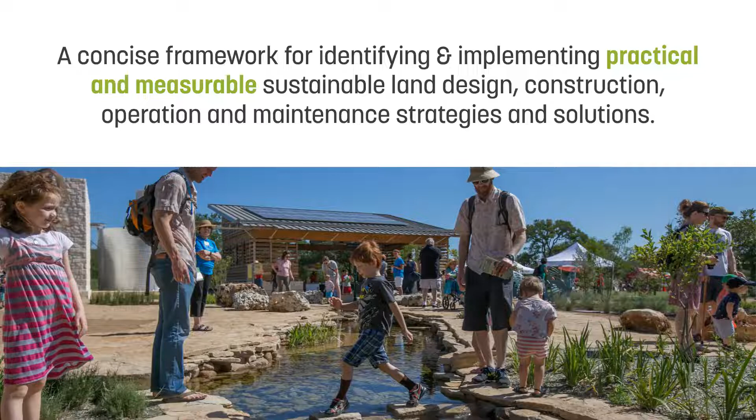In landscape practice today, the Sustainable Sites Initiative, managed by Green Business Certification Incorporation, is often used to rate sustainable land design, construction, operation, and maintenance strategies and solutions. It can also be used as a concise framework for identifying and implementing sustainable landscape. It's more focused on environmental sustainability, with some coverage of the social perspective and limited coverage of economics. The current version includes 10 sections covering site context, pre-design assessment and planning, design, construction, operations and maintenance, education and performance monitoring, and innovation and exemplary performance, with a total of 200 points and 4 certification levels.

Over 100 projects have been certified so far globally, and 5 of them are in China. Among those 5 projects, both Xuhui Runway Park and Guangzhou Biotan Exhibition Center are designed by our teams.

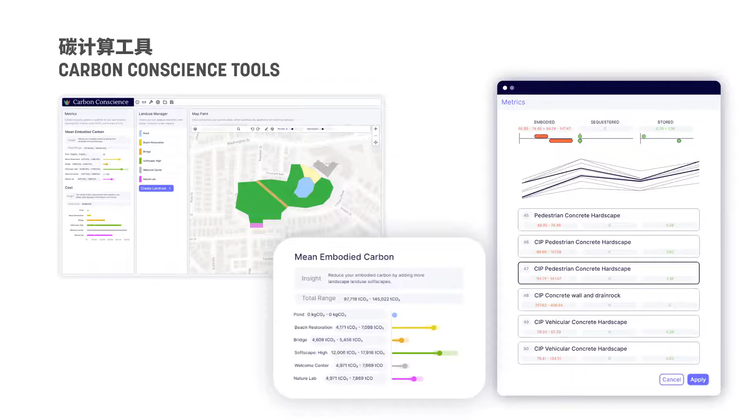Besides sites, many organizations have also developed carbon calculation tools. Carbon Conscience was developed by Sasaki earlier this year. It's used to calculate both the carbon emission and the carbon sequestration for a project.

Next, I'm going to use Xuhui Runway Park as an example to explain what's involved in designing a sustainable landscape and how it gets site certification.

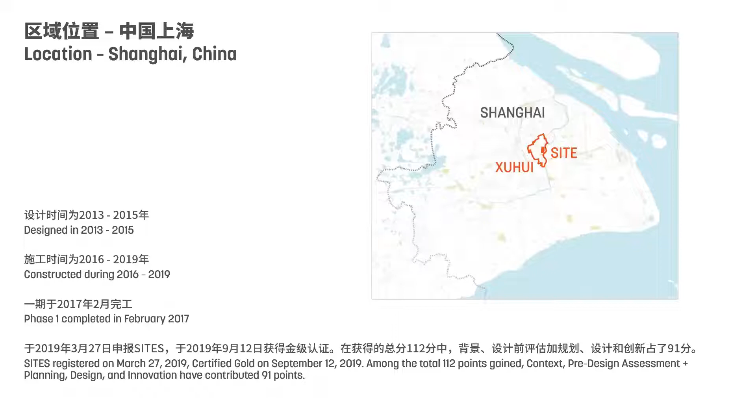The site is in Xuhui district of Shanghai. It used to be the main runway of Longhua Airport for over 70 years. The airport was originally built in 1922 as a military strip, then converted to a civil airport 7 years later. In 1946, when China joined the International Civil Aviation Organization, Longhua Airport was designated as China's primary international airport. It was also the largest international airport in Eastern Asia back then.

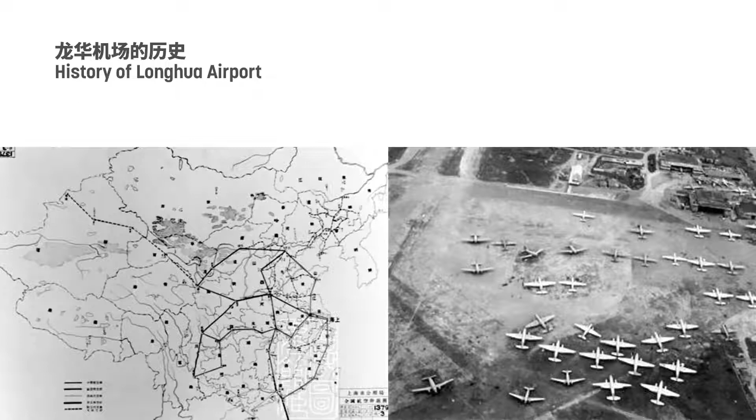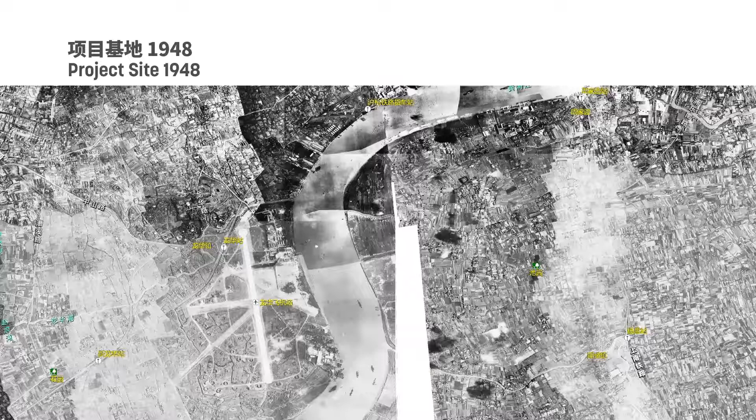The runway we saw today was built in 1948, when the area was still at the perimeter of the city and surrounded by extensive farmland. As the city grew, the area around the airport had been gradually developed, and Shanghai moved its civil aviation base to Hongqiao since the 1960s, although Longhua Airport remained in operation as a general airport until the early 21st century.

In Shanghai's master plan for 2035, Xuhui Riverfront, where the airport was located, was envisioned as one of the future poles of growth and will be transformed into a mixed-use district of residential, commercial, office, and cultural destinations.

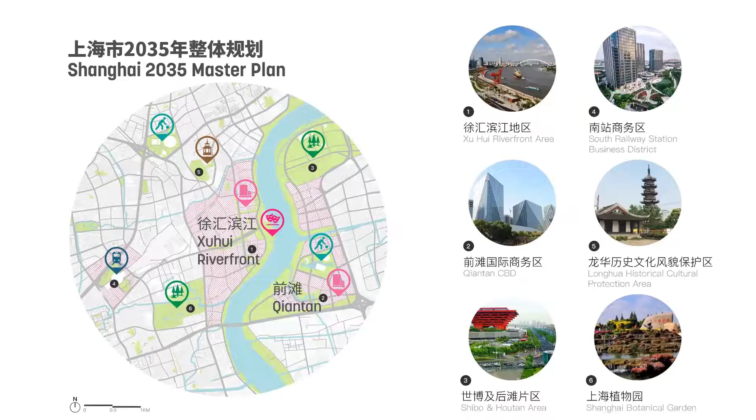The historic runway was to be converted to a 50-meter wide park and a 34-meter wide street. Both are going to be surrounded by high-density residential, commercial, and office uses. A new subway will be running underneath the historic runway.

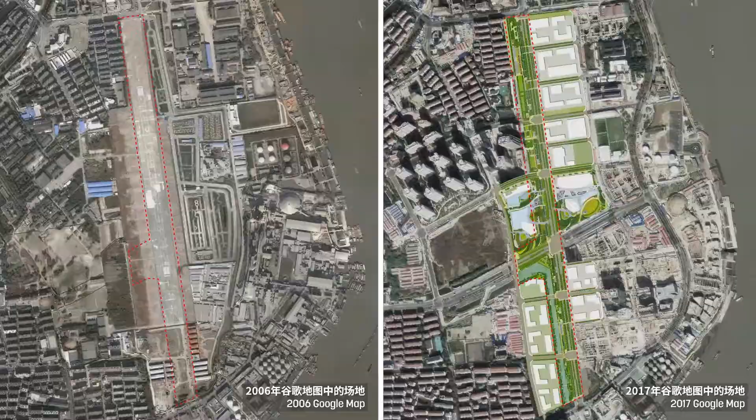As an urban redevelopment, the site itself meets the prerequisites and can get many credits in the site context section of sites. It was a developed brownfield site within existing developed areas and will be well connected with multimodal transit networks.

Our design concept, Runway of Modern Life, was inspired by the site's unique history and integrates with nearby communities' daily needs. The design mimics the motion of a runway, creating diverse linear spaces for vehicles, bicycles, and pedestrians, and organizing the park and the street into an interconnected sequence at a runway scale, a runway of modern life.

Although all spaces are linear in form, we had used different scales, topography, programs, and materials to create diverse spatial experience. Ascending and descending movements were applied in the park to replicate the experience of being on an airplane, connecting visitors to the site's past and providing a collection of distinctive views.

The layout of the street also contributes to the urban scale of the district by limiting the number of vehicular travel lanes and promoting public transit over personal cars. Designated bike lanes are integrated into the street section, facilitating the last 1 kilometer transit connection between the transit and various destinations. 6 rows of deciduous trees were planted along the street to create a comfortable microclimate, seasonal color, and a pedestrian-scaled boulevard.

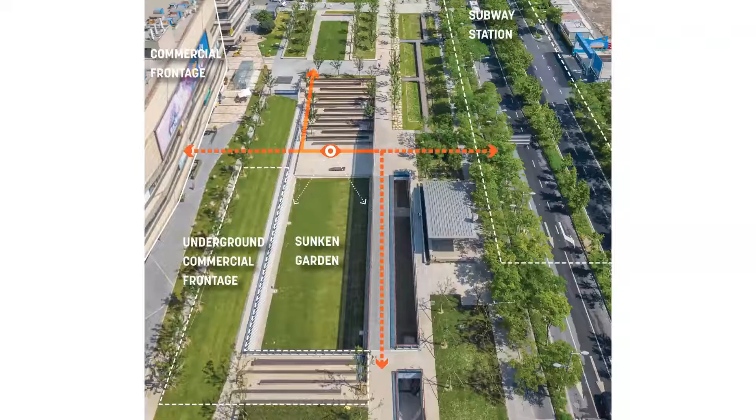The project was designed and built before it registered for sites. We simply followed good practice for a sustainable landscape through the entire design and construction process. The design was focused on connection and uses, site memory, stormwater management, native plants, and habitats. And those were closely related to the social, environmental, and economic perspectives of sustainable landscape.

We had planned diverse programs in the park, accessible to all and primarily free of charge. Active lifestyles are nurtured in multiple forms of runways. Informal soccer games can be held in multi-purpose lawn. Cultural events and performances are accommodated in the sunken garden, while smaller social gatherings can take place in various restaurants and public service facilities scattered throughout the park.

Private conversations and reflection can take place in multiple gardens, the riverfront, and bird-watching grove, offering a respite from the busy urban life.

The entire park is universally accessible, providing equal opportunities for all groups of people. The park has served as a year-round destination for nearby residents, office workers, families, and students today. All of these meet the requirements of the human health and well-being section in sites and received many credits. The park is accessible, promoting equitable use, supporting mental restoration, physical activity, and social connection.

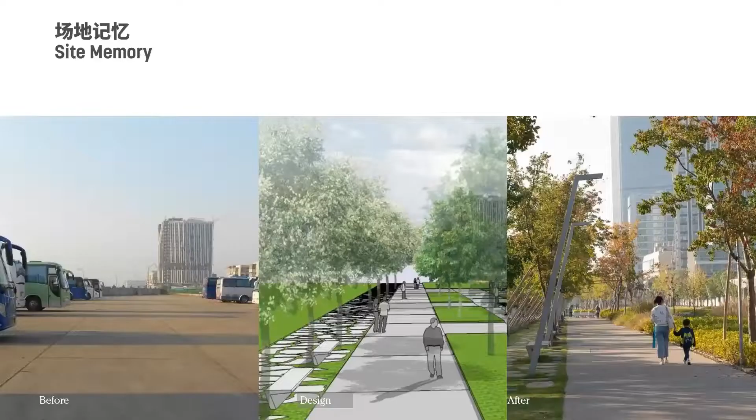When we were tracing the site memory from its airport life, we had carefully investigated the site and identified a row of original runway concrete panels, which remained integral and structurally sound. These panels were preserved as the main path of the park to prolong the site's memory.

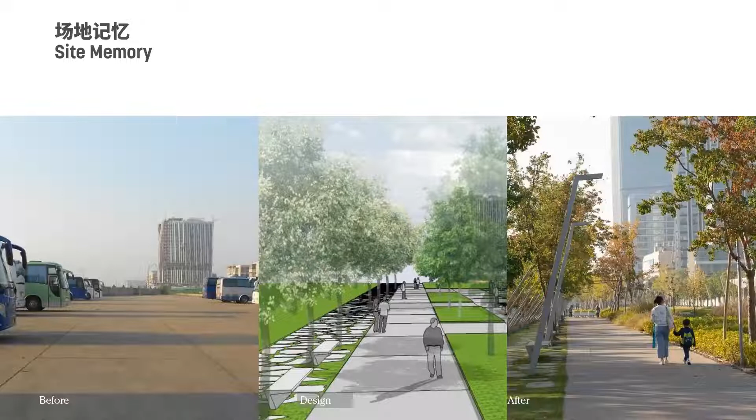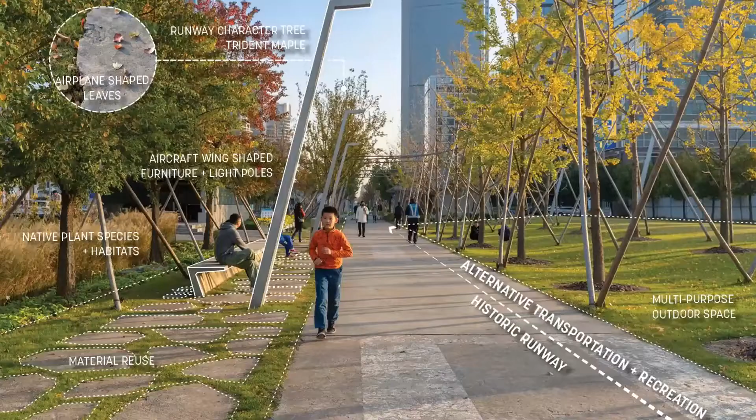The smaller concrete sections from the demolished runway were also reused at the resting areas around the main path. Trident maple was planted as the iconic tree species, delineating the preserved runway panels due to its similar leaf form to the Trident airplane. The preservation and reuse of the runway concrete on site has not only saved construction cost, but also reduced greenhouse gas emissions from manufacturing new concrete.

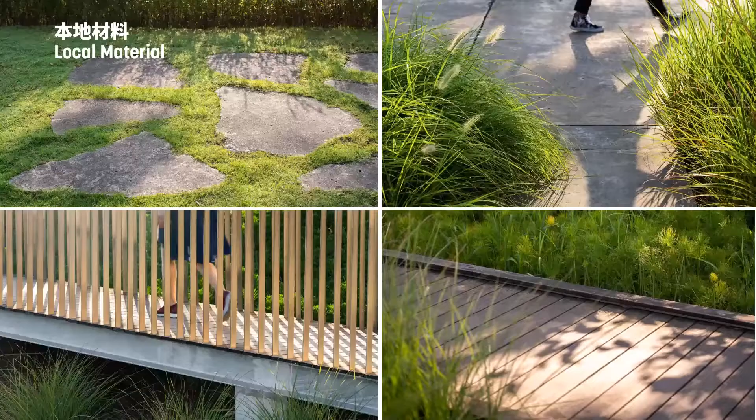The site furnishings were designed to evoke an aviation-inspired identity, with benches and light posts recalling the form of airplane wings. Most construction materials were sourced locally to reduce emissions from transportation and support the local economy. For example, fused bamboo lumber was used as a sustainable substitute for tropical hardwood on benches, boardwalks, and riverfront overlooks due to its fast-growing nature, comparable strength, and longevity in outdoor environments.

The material selections we made entitled us to credits for maintaining existing pavement, using salvaged materials, and regional materials.

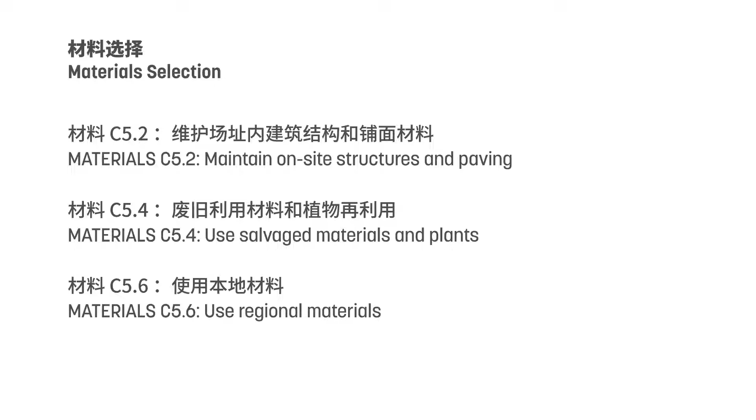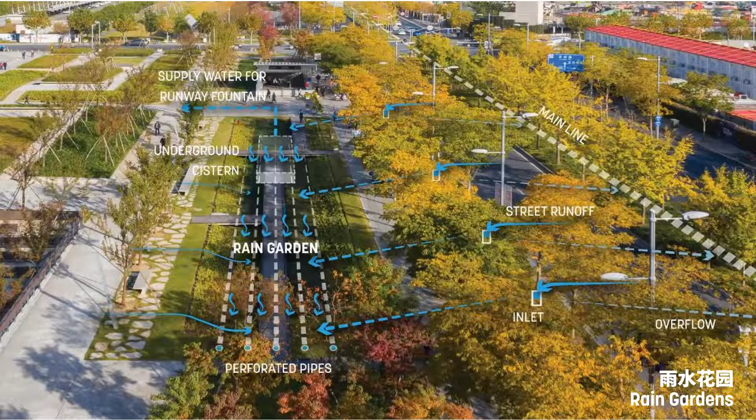Stormwater from both the park and the street is managed through the rain gardens and constructed wetland. The rain gardens can collect and filter up to the 95th percentile of annual storm events. The treated stormwater meets quality requirements for recreational water suitable for human touch under local codes. Portions of the treated stormwater are diverted to an underground cistern and prepared for the park's operational use, including the full water supply for the interactive runway fountain.

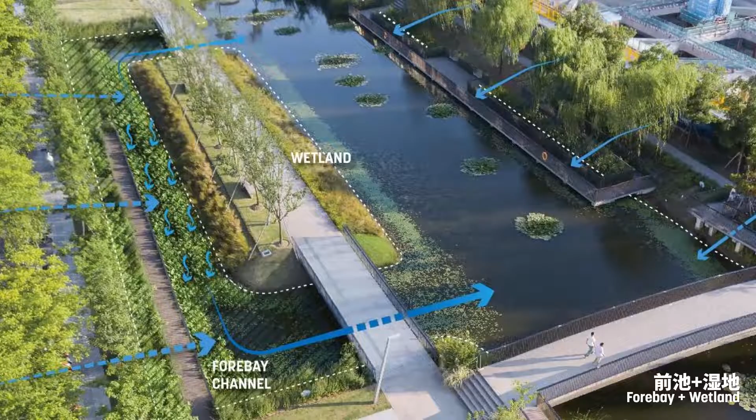The rainwater along the canal was filtered through the forebay and the constructed wetland. It not only settles sediments and filters pollutants in the runoff, but also provides a stable supply for the canal. All the effort in stormwater management also gets us multiple credits related to managing precipitation, reducing water use and irrigation, and designing functional stormwater amenities.

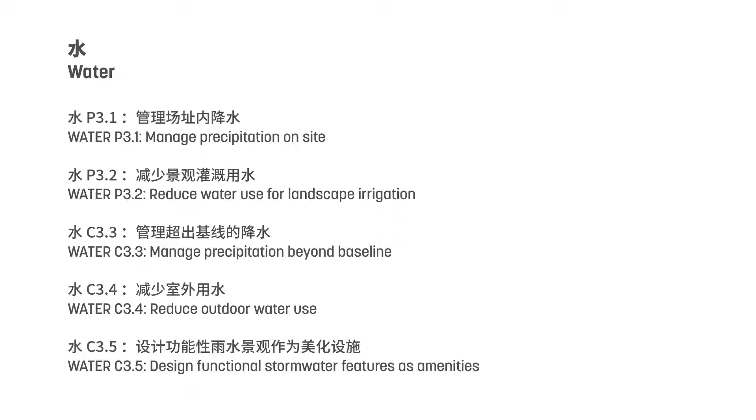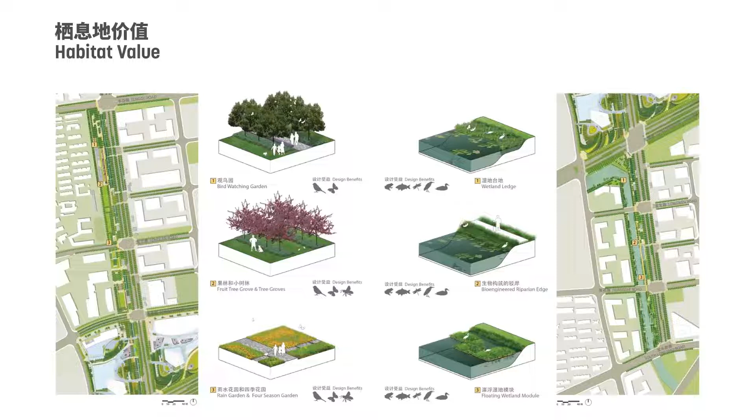All the stormwater treatment measures offer not only nice scenery, but also valuable wildlife habitat. In the rain gardens, you'll find iris and purple loosestrife in the spring, hosta and silvergrass in the summer, and chrysanthemum in the fall. It has become a place enjoyed by people and diverse wildlife species all year round.

The canal front, the forebay, and wetland provide great habitats for waterfowl and attract many people to come and enjoy. All plants in the park are native to the Yangtze River Delta. 68% of the park's hardscape is shaded, providing a comfortable microclimate.

These also contributed to the soil and vegetation credits. We used all native plants and restored native plant communities, optimized the biomass, and reduced urban heat island effects.

Among the total 112 points the project received, site context, pre-design assessment and planning, and design and innovation contributed 91 points. At the end, the project received the first SITES Gold certification in mainland China, and many national and international design awards.

Following the project's construction, many major residential, commercial, and office developments were implemented on adjacent parcels. The property value of the adjoining neighborhood has increased over 80% since 2015. The project turned out to be a real success.

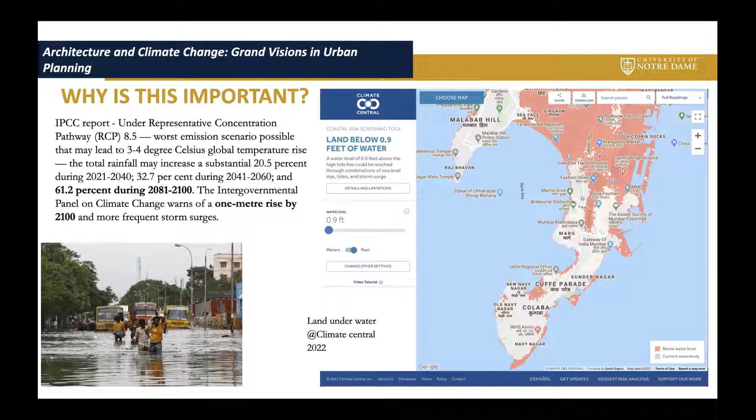The report from IPCC's research on this topic showed a large impact due to sea level rise predictions for the area. The Government of India has measured tidal wave information and seen a dramatic increase in water levels in just a span of 7 years. It is predicted that the city would see a meter rise by 2100. This created major concern for people involved in the studies, and a deeper dive into understanding the impact of sea level rise and climate change on the city of Mumbai was needed.

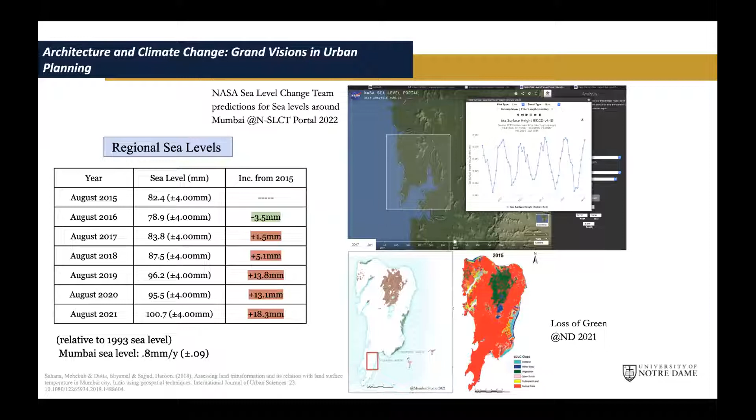The city also faces issues due to drinking water scarcity. An estimated 55% of people live under poverty conditions with very poor housing available. With depleting resources, including groundwater, which is slowly drying up and being utilized at a very high rate, the impact of sea level rise is not just from water surrounding the land, but also from it slowly entering the water tables of the city, creating contamination issues.

Surrounded on three sides by water and with a population of around 22 million people, around 9 million live on the planned site that is the area of study for this research. The site became extremely critical to examine at this time.

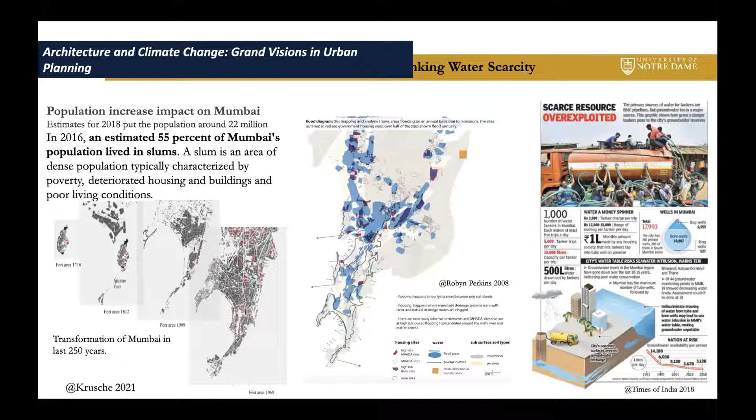The research question posed was: how do we predict which of these data sets are correct, and what would be the impact of sea level rise on the city of Mumbai? How important is it to understand the source of the data being used and the accuracy of this level of study? The NASA sea level change team seems to have the most resourceful data sets. These are much more precise in the context of the United States, but also fairly strong in the case of Mumbai, and are being used to examine the sea level rise projection for the site.

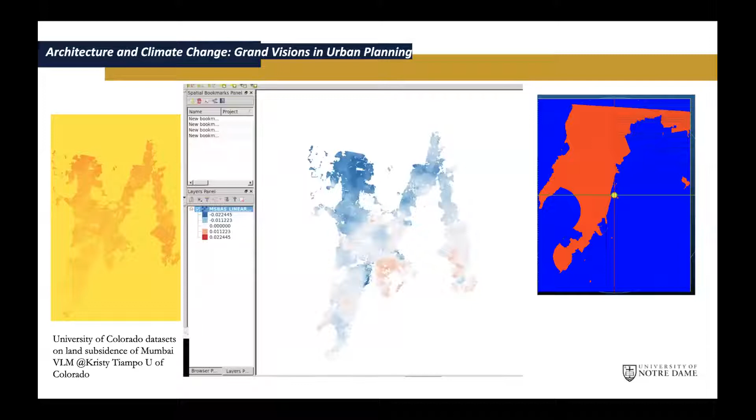Beyond these, there was a need for information related to surface DEM, or digital elevation models, and land subsidence for the city. The University of Colorado's research center, CIRES, is looking at land indentation and land subsidence data for Mumbai. We are cross-referencing these data sets with tidal data from the Government of India and land data collected from Xylem Water Solutions. All this information is put together to allow a collective examination of the impact of sea level rise and heavy rainfall on the city of Mumbai.

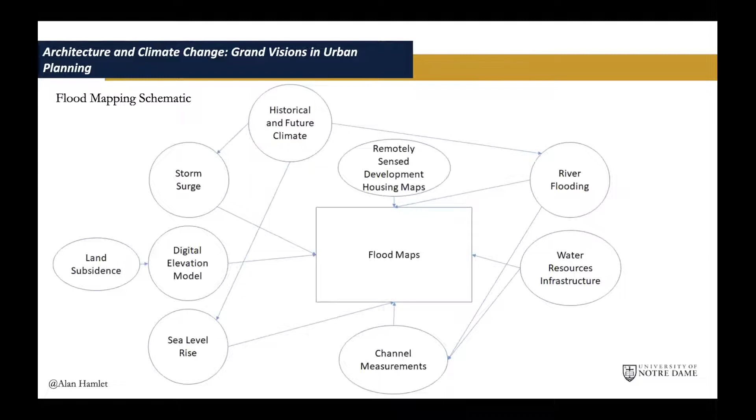This, along with various teams we have at Notre Dame, including computer science, engineering, hydrology, and of course the School of Architecture, have created a consortium to tackle the problem of understanding the cumulative impact on the site.

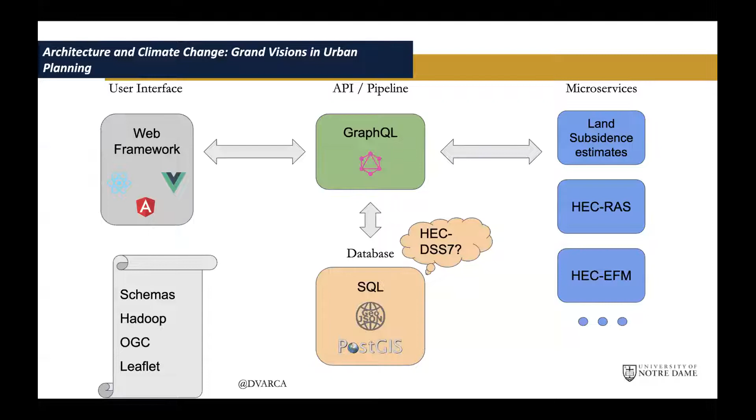This ongoing study will be available in a visual way for various researchers to use in the future, on a Python platform that we hope to integrate on the NASA website, giving government authorities proper predictability and resourceful use of the data for planning purposes.

So what would be the right solution for the city of Mumbai? The right solution would have to create a balance between the biosphere that surrounds the site, allowing the natural environment and built environment to coexist positively. A good urban plan would normally balance both in a manner that allows the coexistence of natural ecosystems along with built ecosystems in a way that we survive today.

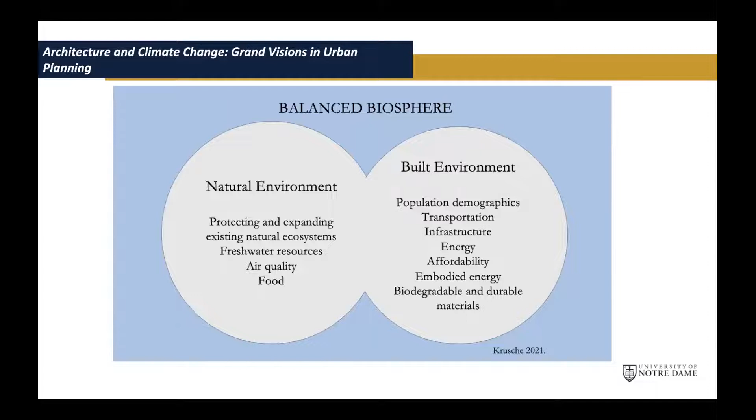The eastern waterfront of Mumbai city is a $1 trillion development property, mainly under the possession of Mumbai Port authorities, a large holding for the Indian Navy and other government activities. This area is predominantly used as a port and has been open for new development in recent months. As the city grows, this land will play a vital role in its future development.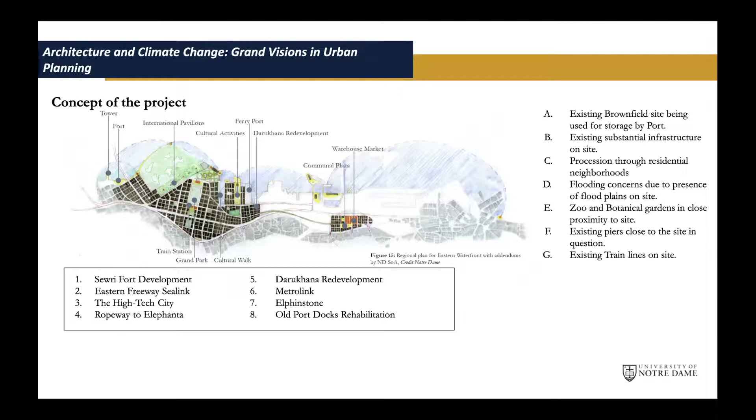The solution we proposed here took many, many months of work to come together, and this is the first conceptual thought process put together by the class of 2022. The solution for the design was to take into consideration the fact that there are low-lying areas that had to have green natural parkland in relation to the new development. Our research showed that the site is highly susceptible to low-lying floodplains.

The whole area would have to have a lagoon that would protect the site from large tidal impact and also act as a natural barrier between the sweetwater and saltwater zones. The tidal lagoon would protect the outer edge of the city, similar to the lagoon concept being proposed in Wales recently, and would reduce large tidal impact on the site, creating new green space full of natural lowland greens common to this area's ecosystem, allowing various natural species to coexist.

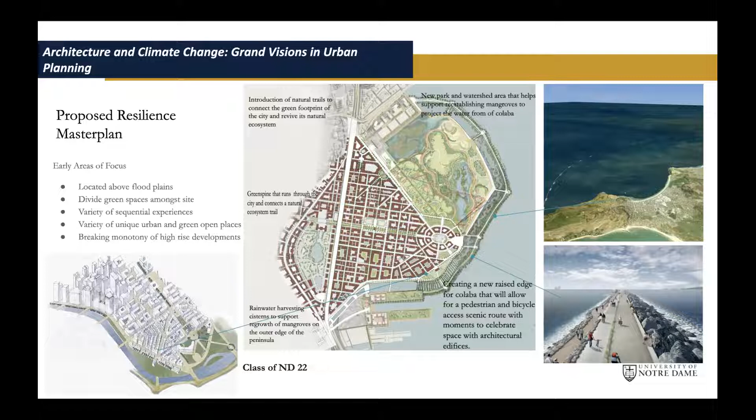You can see there are sections throughout the site we are proposing which will have the biggest impact on creating the biodiversity we want to bring to the site, with around 52% of the development being green in comparison to new development in the area, bringing coexistence between nature and built environment in a balanced manner.

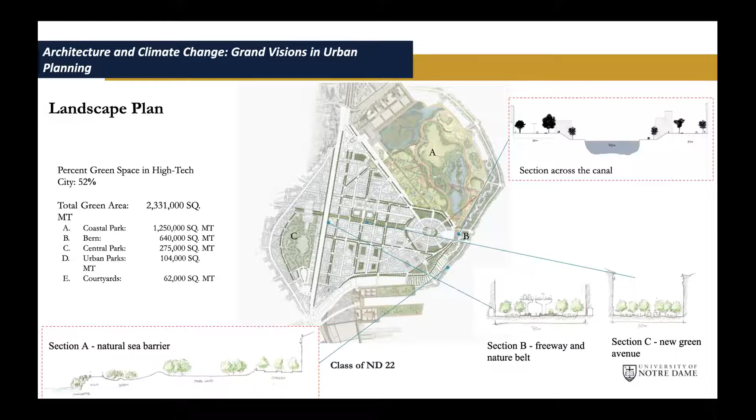The built part of the development is raised on a level on top that would allow urban development to be built with green infrastructure solutions. This proposal talks about elevating the ground level to allow parking and storage underneath, allowing the built-up area to become a place where people have easy access to the site, while integrating the experience with natural resources without feeling disconnected from the ground.

You will see that in this proposal, the built area would be connected with means of water harvesting throughout the site, with underground water storage and cleaning systems, such as natural reed bed water purification plants for clean water provisions.

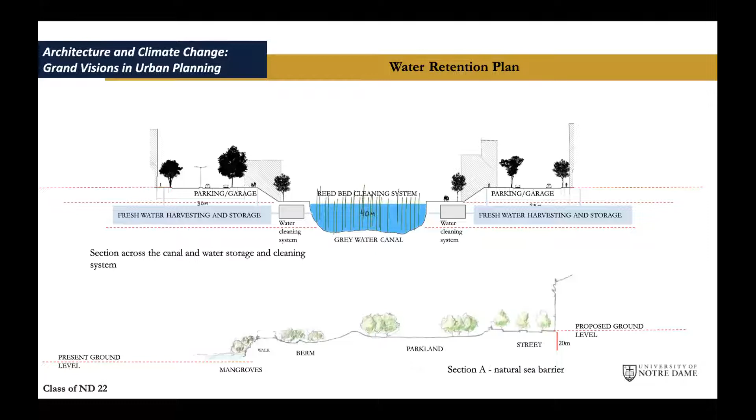The environmental impact is also very positive because we are finding ways to largely utilize the monsoon water that comes at very high speed in the city of Mumbai, recharging the water tables and natural water resources in the area, thus reducing seawater flow and reducing not just contamination but also sea level rise impact from the water flow.

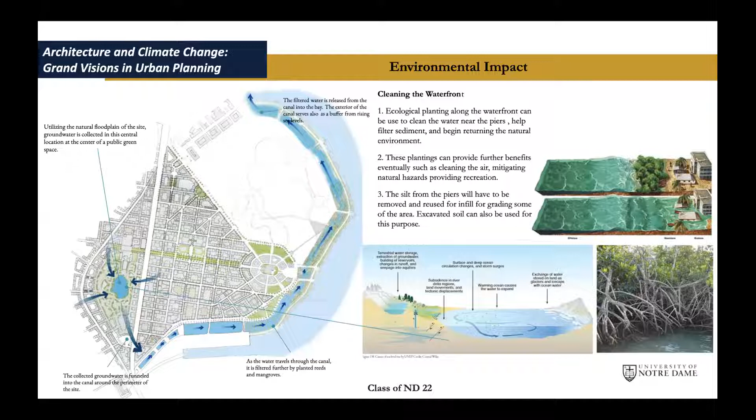In conclusion, the research notes that we cannot completely change the sea level rise concern itself, but the way the city would be planned would allow for better movement, higher circulation, greater connectivity, and a greater sense of character, time, and place, while creating an environmentally conscious site.

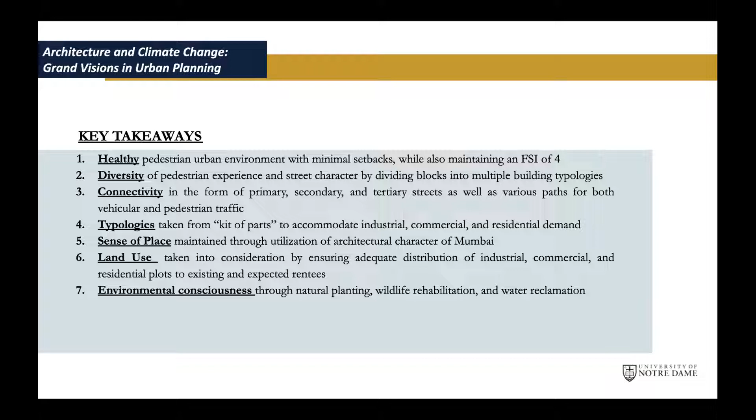Thank you very much, Krupali and Duo Zhang. This is fantastic, really interesting approaches to two different projects, two big cities. I have learned a lot from both. I'd seen some of the Mumbai project, but in small elements. I had not seen the one in Shanghai, and I thought it's really, really fantastic indeed.

Really fantastic project. Now, before I start the question, I just want to acknowledge we have William Bates with us somewhere in the audience. He is the president of AIA. So just acknowledging his presence, and a Notre Dame alumni as well.

As we start, I'm going to start with Duo Zhang. In your design for this particular project, it looks like you're focused on urban heat. I just wanted you to talk about this a little bit more. What are the key elements you used to address urban heat?

Oh, this is a park project, focused on the public realm. Our scope covers both the park and the street. In such context, one of the major measures we used to reduce the urban heat island effect is to provide more shade to the paved areas. Over 68% of the hardscape is covered by deciduous trees. I particularly mention deciduous trees because in landscape design we're quite focused on that. Although evergreen trees can also provide shade, in winter in Shanghai's climate people also love to have sunshine, so deciduous trees are always a good choice to allow balance between the two.